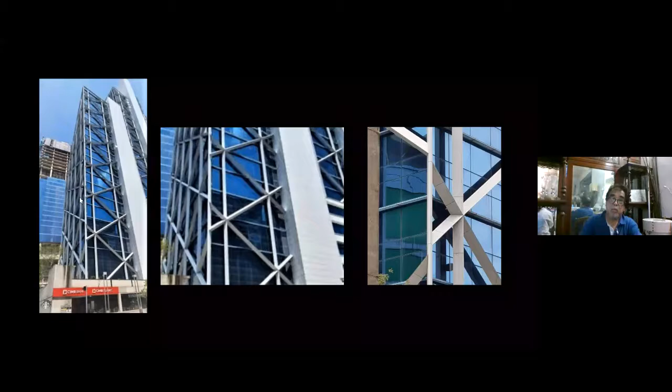Now, here is a picture of a building. It's a building, I call it a building. But can you call this architecture? Look at this facade - this is chaos. Look at this detail, look at the connection here. The designers don't understand construction, they don't understand structures. So is this architecture? Is this the type of architecture you've been trained, taught to design? Are you telling me this is architecture? This is not architecture, I'm sorry.

They did not have any computers, they did not have any CAD program. They had no SketchUp, no Rhinoceros, no Revit, no SketchUp - they had all sorts of software we have names for. They had nothing. Now here you have Photoshop, you've got everything, and yet that so-called designer could come up with this sort of rubbish. This is disgraceful. I hope your school is not training you people to produce this sort of architecture. All right, so...

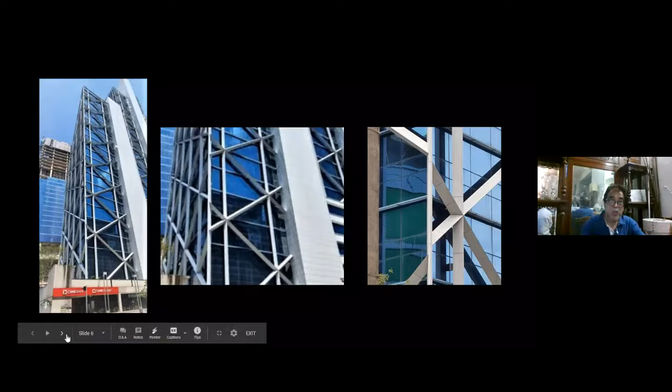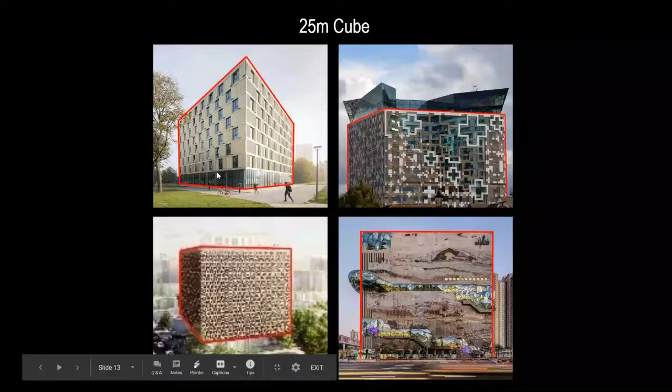No. These are other examples of the 25-meter cube, some work done by different architects. But what I want to show here is, this building on the top did not happen just by coincidence. It happened because the architect wanted the windows for the wall, and this and that, and he had to work out all the detail, how you connect things, and it's not left to the engineers. The expression of these horizontal beams on the outside becomes part of an architectural manifestation, as compared with this one.

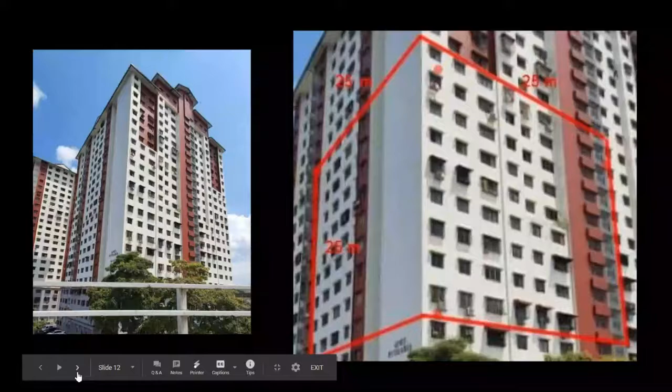What is there to show you? Anything. Cardboard. All right, now, so that's what. Now, I think this project is in the Netherlands, right? Dutch, and I think this one is also a Dutch architect. This is OMA, right?

So again, you see the amount of work, the thought that goes into putting the bits and pieces together, and all that. I mean, you don't leave this all to engineers, you know. You cannot say that the engineer did that. Okay, so now this building here, I think this one is in England, in Birmingham. Again, I don't necessarily like what they have done, but then what I'm showing is the detailing.

How did they fix this hollow cross here? And then the building facade goes in, it comes out. It doesn't look funny, but you have to design that. That's why you are a designer. You must know how to put things together.

Okay, then here, this one here is a project that's somewhere in Europe. I think I cannot remember. It's Albania, yeah, Europe, that's why I saw that. So it is a very complex design, integrated. But whatever it is, the designer had conceptualized and crafted.

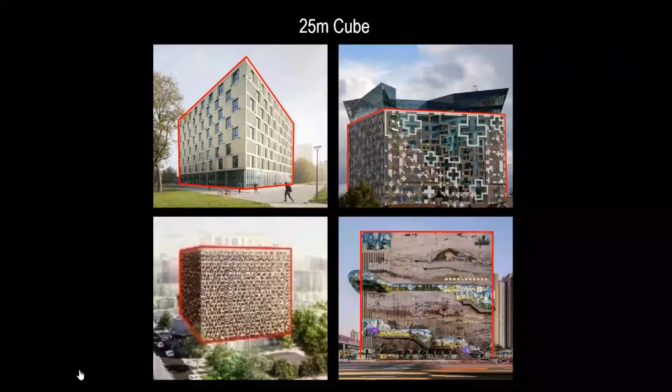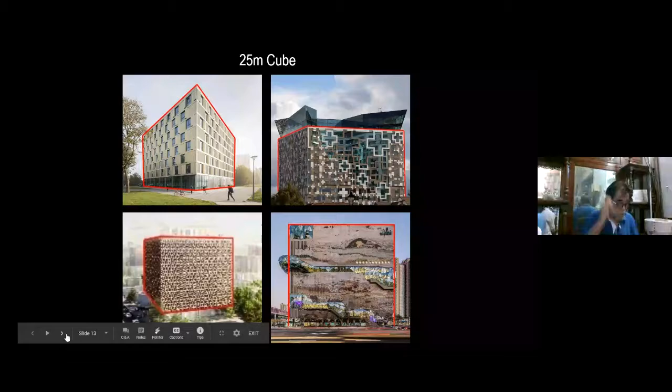Now, how do I do that? I make sure that when I put things together, I understand how they are. They have to be looking good. They have to feel good. They have to be excellent. They have to be breaking through what I call the IIC. IIC is the invisible intellectual ceiling, so that you are doing it.

Now, how do I do that? I do that by making sure that I try a lot of my ideas first. I do it, and having done it, then I can move forward.

You see, as an architect, you have to start by being humble. You got to be humble because when you are in humility, you are looking at things at the grassroots level. You understand what history is, what the environment, what the needs of the people are, what are the issues—the social issues, and historical, and so forth. Then, in the state of humility, prostrated on the ground, you are able to see everything at grassroots. After you've understood all this and have absorbed all this into you, into your inner self, you then start to craft your building along these values.

So what I do is, from the state of humility, I then engage myself in what I call the Tai Chi of Architecture. In other words, Tai Chi is a form of Chinese Kung Fu, where you utilize the energy of your opposition to overcome the opposition, whilst you minimize your own energy. So, in the state of humility, you understand all the things, then you use whatever is there to overcome the problem. And that's what it's all about.

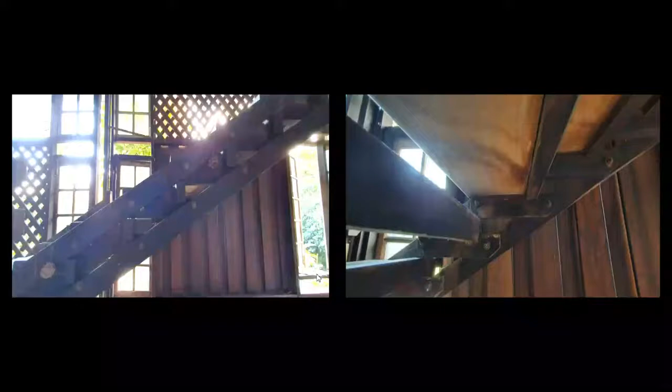Here is an experimental stair, using very small members to create the stairs. This is what the stair looks like—very open, very sustainable, breaking through the invisible ceiling.

And then, because we're in the tropics, it gets hot. So we have a lattice screen and shiplap boarding in a vertical position, this sort of thing. We experimented with all this.

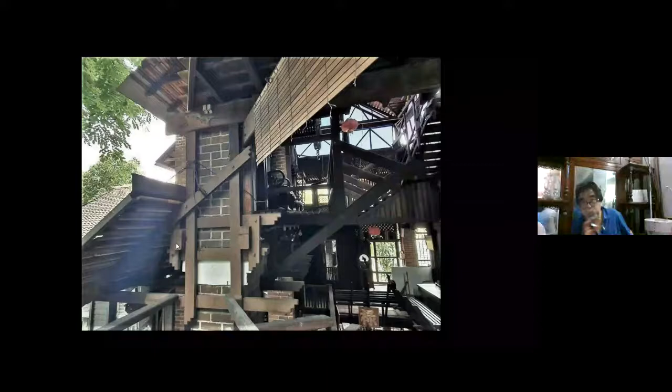This came in a series of YouTube lectures. See, for example, this stair—I'm going from this space back to where I'm standing. Now, instead of just taking a normal stair down, I thought: this is the roof line of the gable end, why not take the stair as part of the gable end up there? This member here is actually part of the ridge, the roof ridge that comes up and is supported here. So through a whole series of triangulation of supports, this stair, sitting on this cantilevered platform, becomes an exciting element.

So when people walk through, it becomes a celebration. Going from here to go down, you don't always have to just go down—you can go up and then go down, or go down and then go up. That's what architecture is all about, having fun.

Here's another view of it, looking from below. See how the thing goes up. And of course, here I have a column supporting this high point with a strut. Here is another triangulation—again, an understanding of structure. Anyone who understands structure would appreciate the complexity of this structure and the simplicity of how it's been constructed.

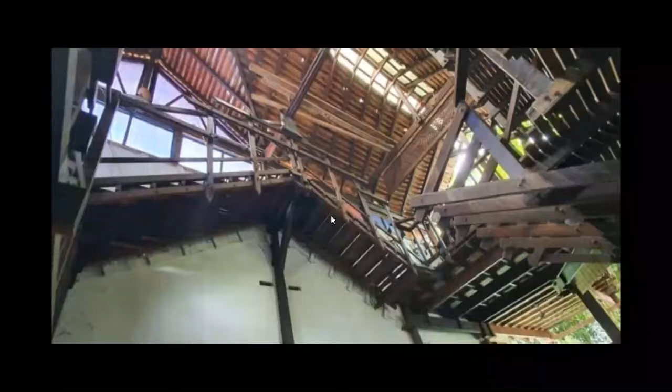So it's simplicity and complexity—like a woman picking her husband, wanting to give an answer that makes you happy, yet at the same time it also makes you unhappy. Now think about what that answer would be, and what the question is.

So we see that it's very complex, yet so simple. The contradiction, the irony of good architecture.

There you are, here's the thing. Look, the stringers are just two pieces, and the structure supports every part of the structure. Now, where is there any room left for the ID?

Hang some drapes here, or hang some flags here—is that the one thing I need to do? Okay, hang some strings going on here, so when the wind blows, the strings can show. Think about it.

Now this is part of a roof. This roof is operable—that means the roof flaps open. So at night, when it's pleasant, you open up the flap, and then you feel you're in a room with no roof over you. That's fantastic.

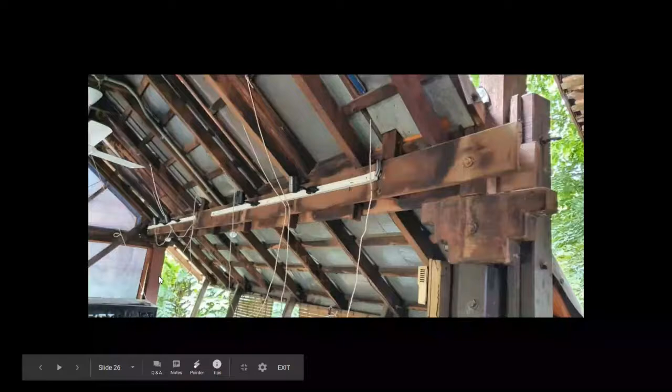So you can span 16 feet or so to carry the roof. What I did is I experimented using 2 pieces of this wood together, sandwiched in between with 2x1 vertical members, spaced about 9 inches apart. Then I lifted these 2 planks off center, instead of having them sandwiched in between. By doing that, I increased the section modulus of this so-called beam from 7 inches to something like 10 inches, so it has no problem spanning 16 feet. In doing so, it creates interesting little patterns.

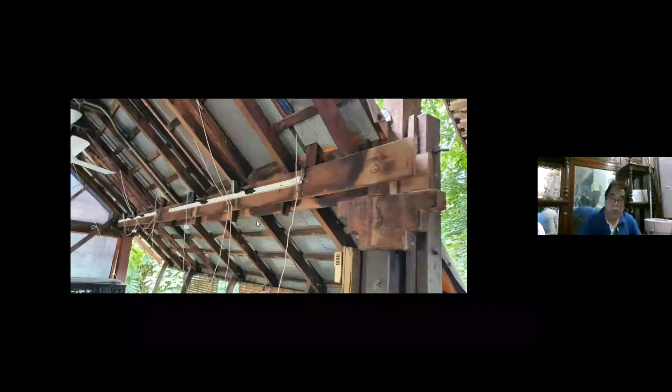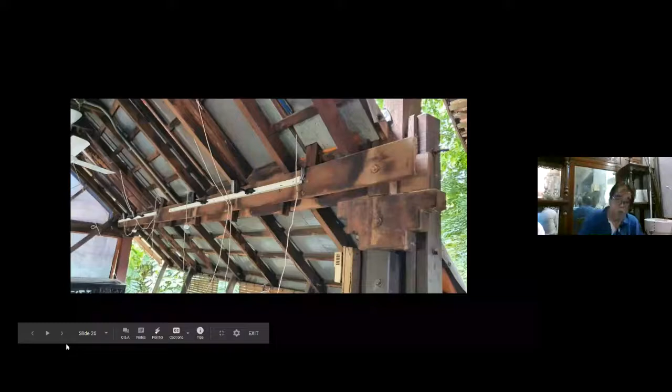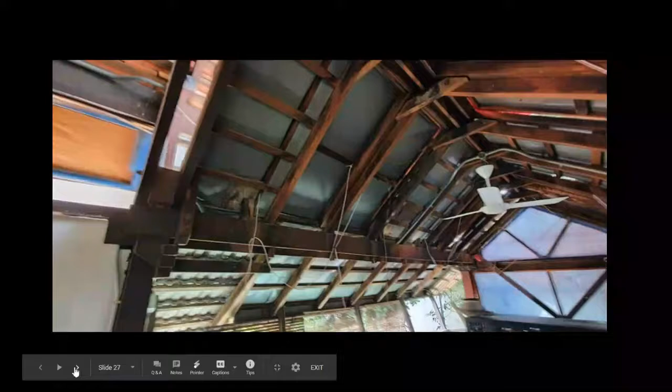All these members are part of the whole structural system. This is a sort of flitch beam situation. As an architect, you must know how to play around with your structure. On the other side of the room, these are the ropes that lift this nose up. Here is a close-up detail of how the whole flitch beam works, so it can prop the thing and make it interesting. Here's a close-up of how the flitch beam works.

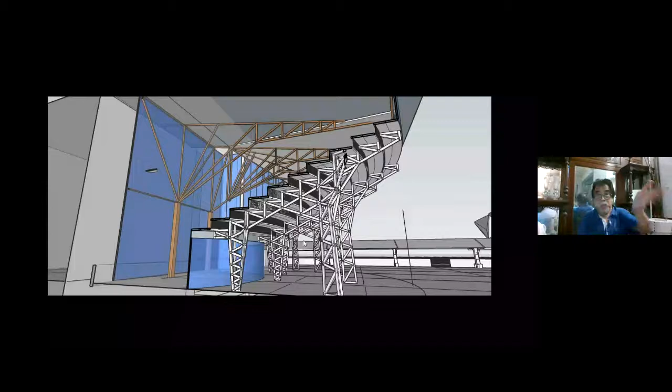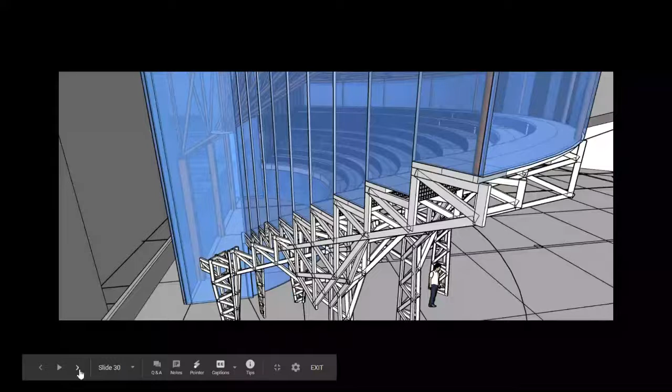Once you understand structures, you always want to make use of the structure to create beauty. These are studies of projects we're working on at the moment, where we're trying to create a whole series of timber frame supports for a gallery. A lot of architects will just draw 2 lines and tell the RC engineer to detail it, and the engineer will screw it up because they've got no idea. So with everything in timber, we show it off so people can see the beauty of timber. The inside is all curved, and these are all timber trusses. Architecture is all about detailing, truly doing your stuff.

Now I just want to quickly walk through 9, 10, or 11 types of details that you use, very common in timber construction.

So you have all this, but I'm not going to explain it, it takes too much time.

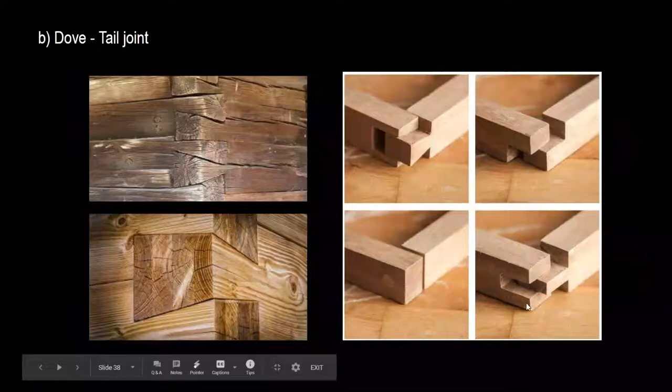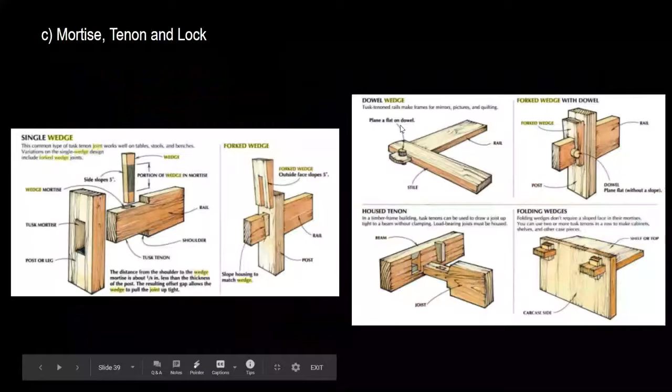Now, dovetailing joints, these are dovetailing joints. To do timber work, you must know how these things work, okay? Then you talk mortise, tenon, and lock. That's how you do mortise tenon. You lock the thing into place and you get rigid joints, and you can always take it apart and move them elsewhere. Okay, and this is tongue and groove.

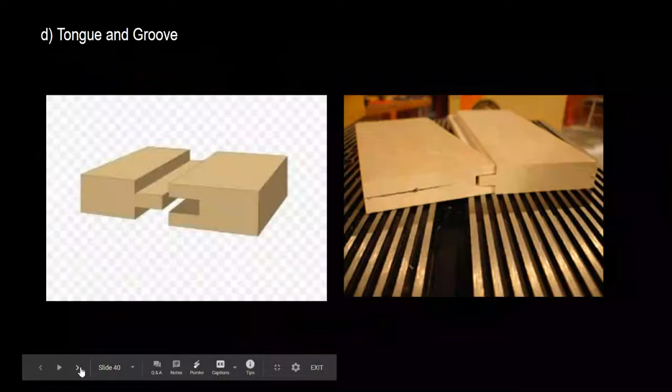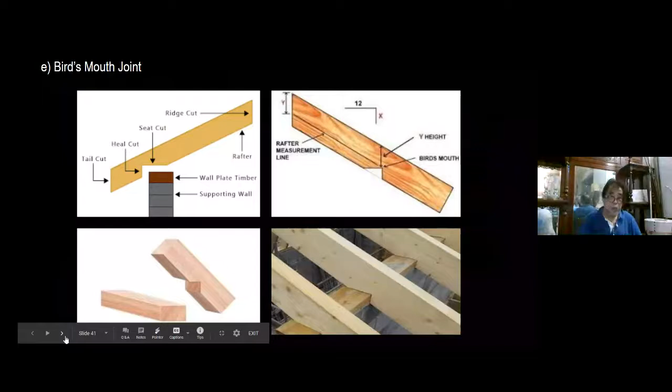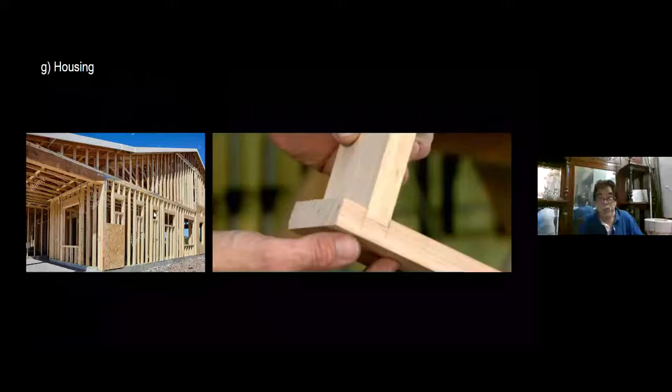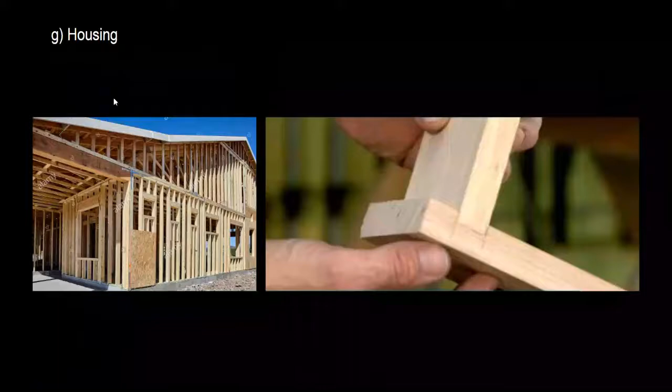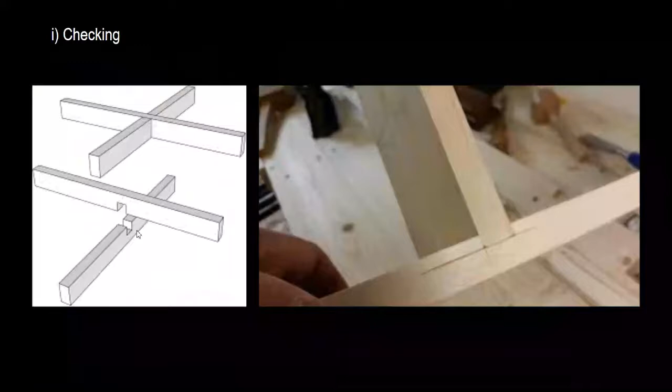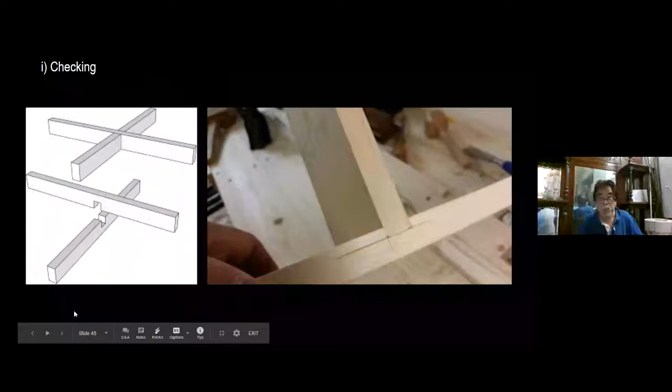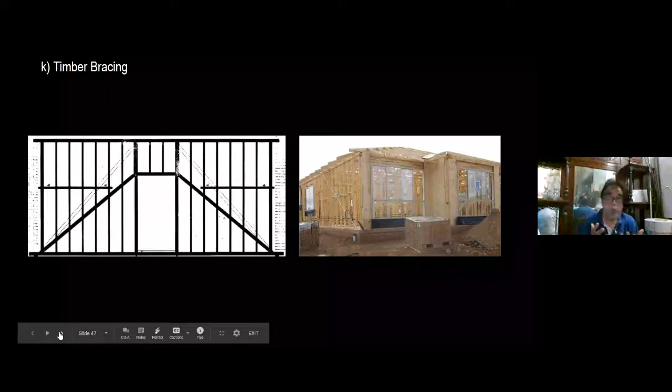And these are all the tools that help to make your design exciting if you know that you have these tools. Design doesn't just come out of fresh air. Don't forget a lot of the techniques we have all been built and learned over the years. And it's only when you understand crafting that you can create things like that.